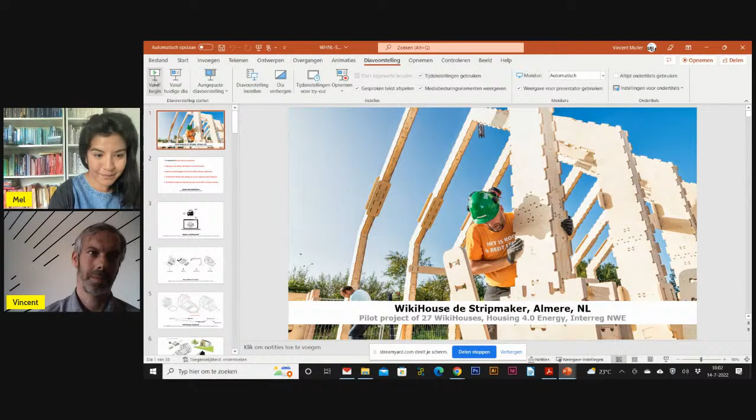So I hope you all see this. Yeah, it's all good. Yeah, okay, nice.

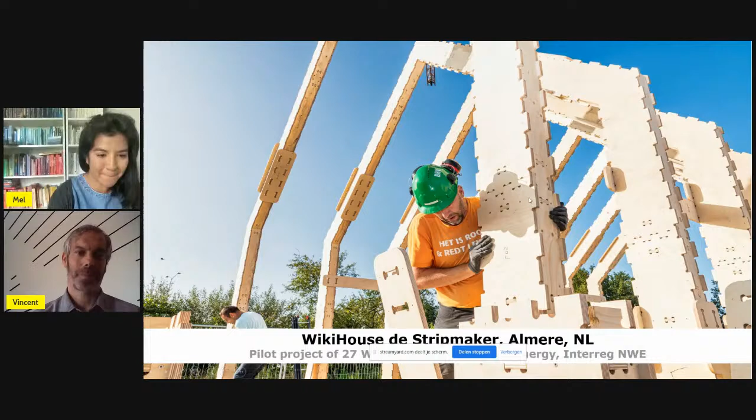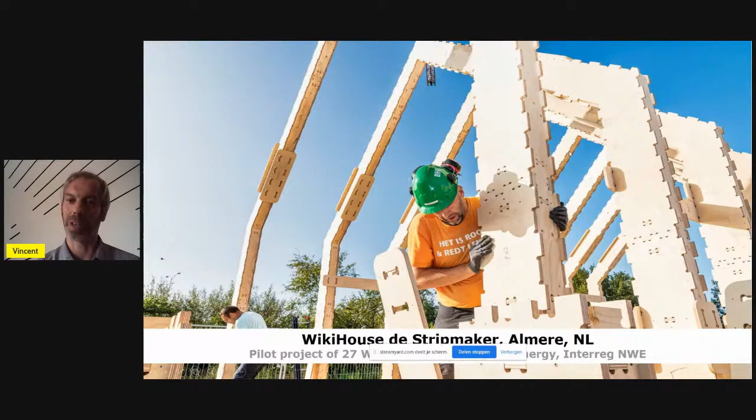Well, it's about the project WikiHouse de Stripmaker. It's the first project with multiple WikiHouses, 27 in this case. The project started in Almere, and the initiative was taken by Woningbouwatelier. Ivar Diekerhoff is also in the background, maybe for questions later. He's the one who came to me with the question: we want to realize a WikiHouse area in Almere with 50 WikiHouses. So that was really cool.

And we had some goals and ambitions created for this project. Very important was that it should be accessible for people with lower income, that it would be possible to make your own design with help of a toolbox, build it yourself together with help of family, friends, and neighbors. And it should be environment friendly, zero energy, low carbon footprint. And of course, important about WikiHouse is sharing the knowledge and experiences - it's the open source part of WikiHouse.

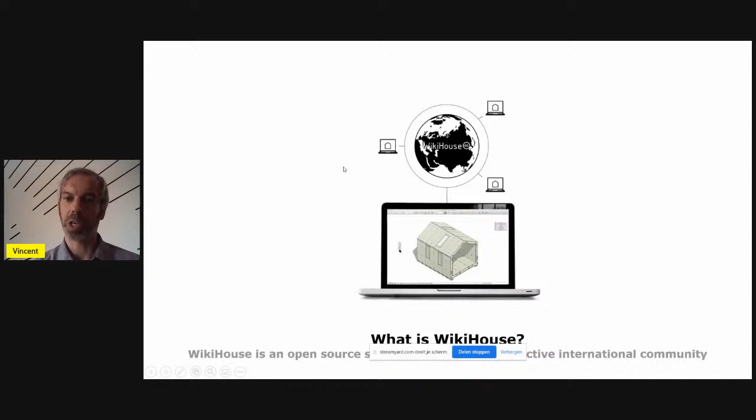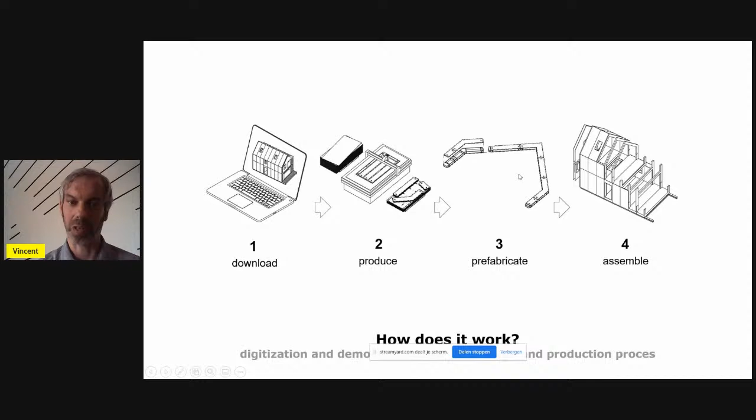Those were the goals. First, I would like to explain a little bit about what is WikiHouse for the ones watching this stream who are new to WikiHouse. I'll try to do it quickly. It's an open source self-built concept with an international community. How does it work? In essence, it's like this: you download files, you produce it with a digital CNC cutter, and then you can assemble your house with the parts. The parts are made of plywood that you can cut with the CNC. So that's very briefly what WikiHouse is.

It's now existing, I think, almost 10 years or even maybe a bit longer. So there are different kinds of systems in different parts of the world, and in Almere we created Swift. We downloaded the files of the Wren system - that's a system from like 5-6 years ago, I think, or even longer. We wanted to improve it or make it fit the local situation in Almere, and also create some better floor plans. We wanted to create a 4.8 meter span width, because Wren could only go to 3.6 meter span. Some other systems are there too, like Blackbird, and of course Skylark, which launched at the beginning of this year.

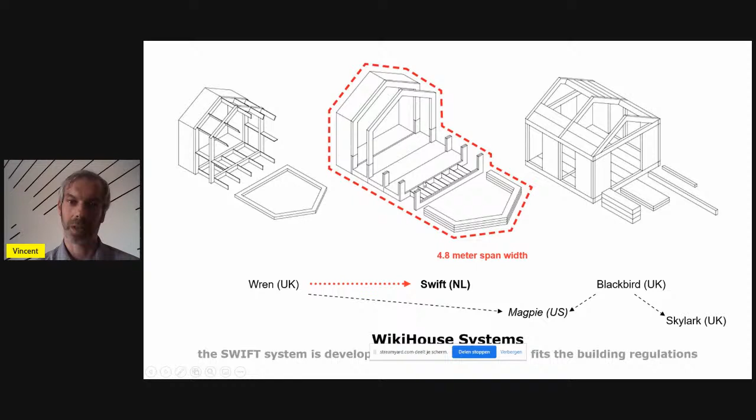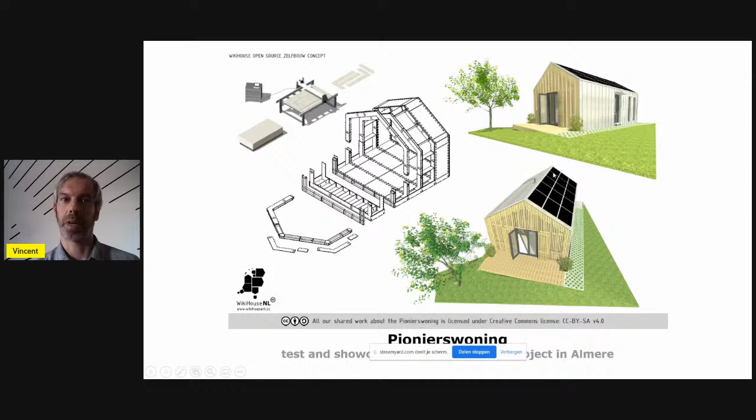With the Swift system, we did a test showcase in Almere before we started with this area of more WikiHouses. It was the first time we were going to realize a WikiHouse you could really live in, one that would fit the permit and the building regulations. This is the test showcase, the pionierswoning in Almere Poort. And this is the design.

It's a small house. Here you can see a little bit how the Swift system works. It's based on slices, or modules, as we call them, and you can create a house by putting more modules behind each other.

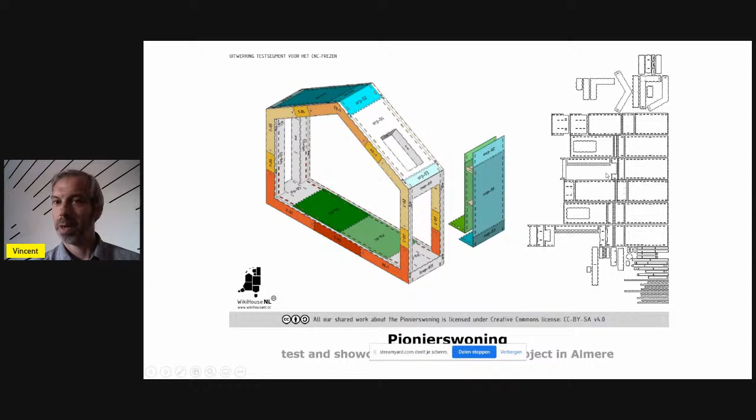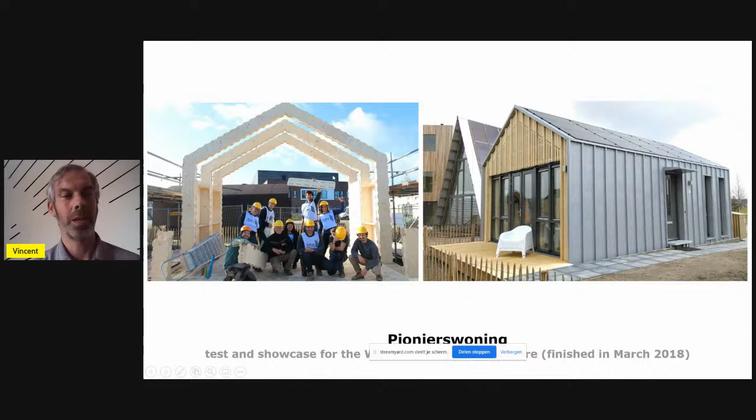This is what is realized. This is the pionierswoning. This test case we also helped build, together with some international volunteers who were interested in the WikiHouse way of building.

Well, it was a success, the pionierswoning. It worked pretty well. Then we needed a location for this area with more WikiHouses. So it ended up with 28 WikiHouses instead of the 50 that was originally asked.

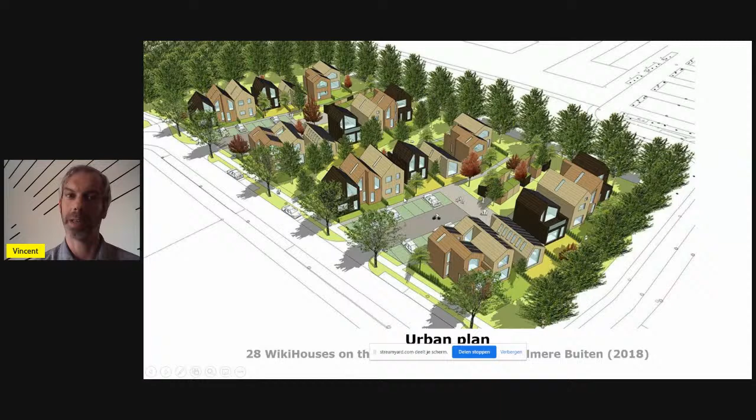But we got this really nice area on the edge of the city, close to a natural environment. So this is the urban plan, which we used for discussion with the municipality and creating a vision for what it should be, along with some images of how the exterior should look, together with the municipality and urban designer. Natural materials, not stone or concrete or whatever.

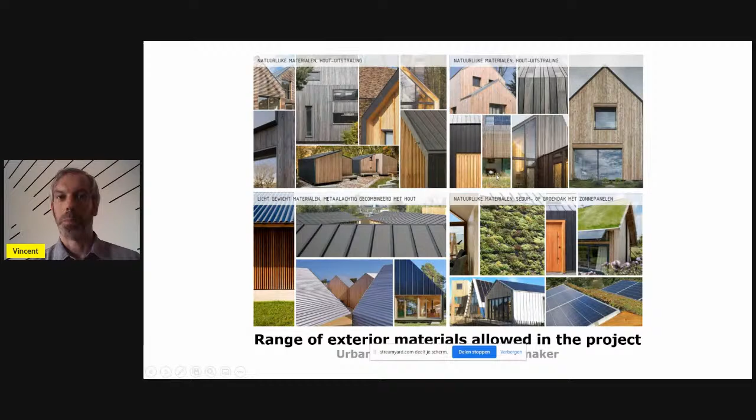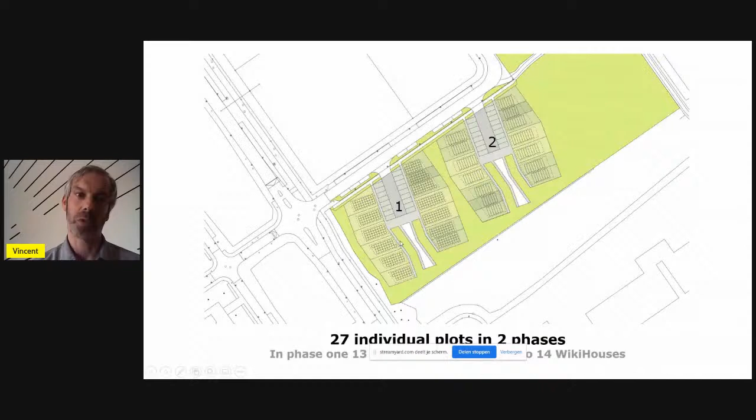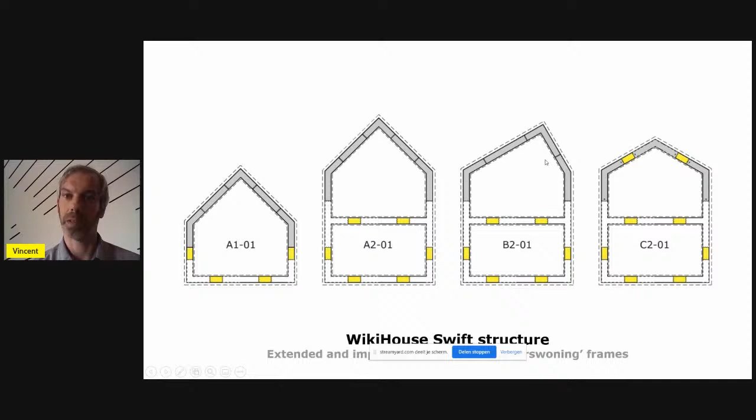So I will start with phase 1. The first challenge we had before we started the project was to change the Swift system of the pionierswoning, similar to this one, the A1, to make an extra floor. So we did a lot of structural tests and calculations together with advisors to create it, and in the end, it worked out to this system.

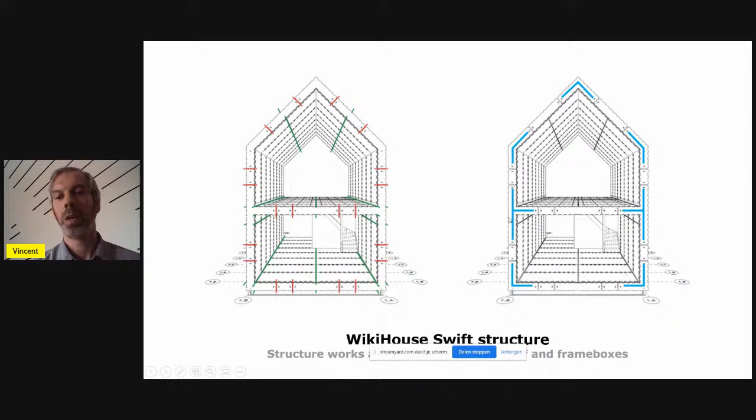So we decided to make the frame pieces all in birchwood. Birchwood is stronger than spruce plywood, which is what the rest of the parts use. And from there...

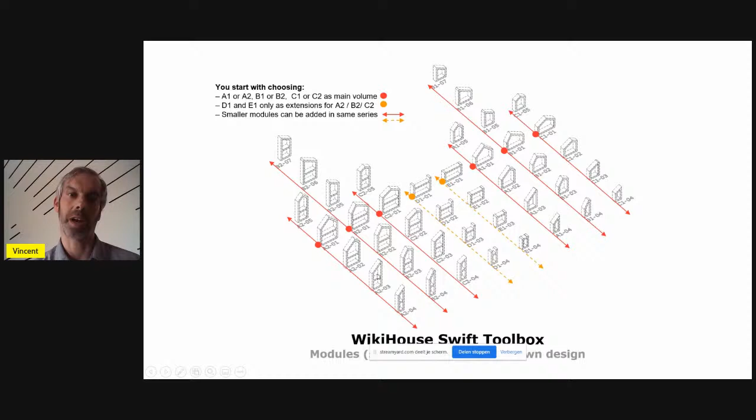So for phase one, we started with a kind of workshop using scale models, and they designed their own house exactly to scale together. That was really fun to see, because they really checked each other out, asking why are you doing this, and then they got inspired by each other. It was really fun to see them changing their designs because the neighbor was doing something else that they also liked.

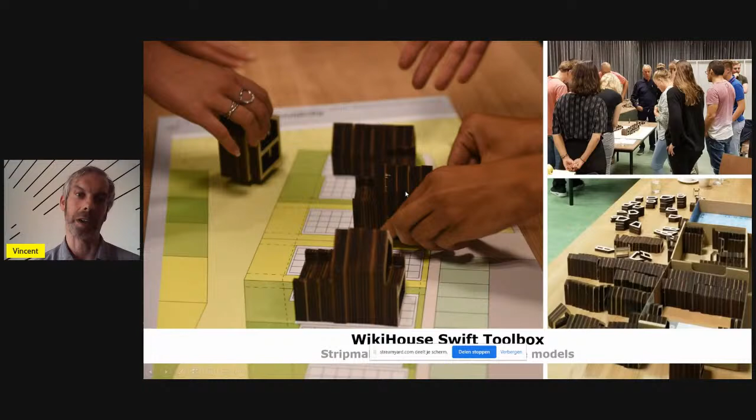For example, this is one of the designs of Sebastian, one of the guys really involved in WikiHouse, especially the construction. We made this design - well, actually he made it, and I helped him with that.

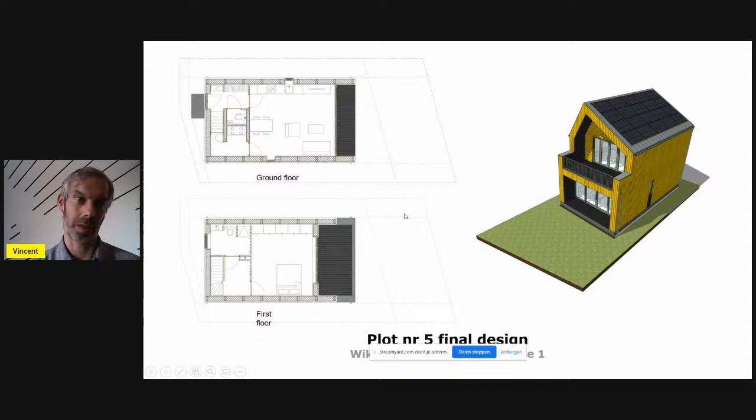And this is the final design, which is where the permit is. We got the permit. Here you see the final designs of phase one. The yellow one is still this of Sebastian, plot number 5.

Now, after the permit, you start with construction. Well, there's a lot of logistics before that, and planning of course. But you have to know what the building order is of the Swift system, so this is how it works.

Mainly, you start with the foundation. That's done by a contractor - you cannot do that yourself. It's like steel beams and concrete piles in this case. Of course, it depends on your location how your foundation will be made.

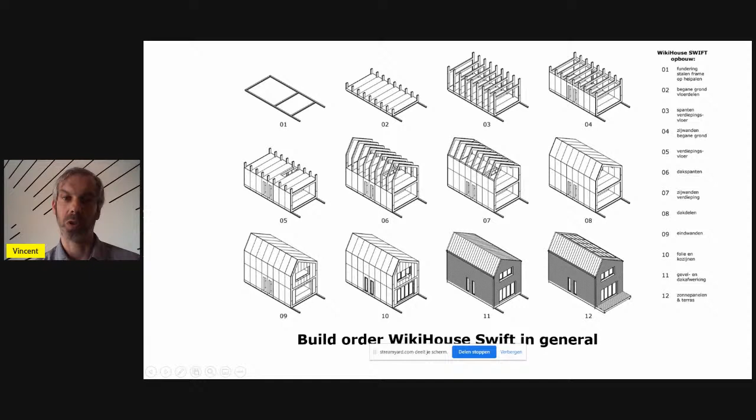But after that, you're going to build your floor modules, like number 2. Then you start raising frames, adding wall sheets, floor sheets, and then you go to the next frame, the roof frames, and then again all the sheets. From there, you're going to put your windows in and finish your house on the outside.

Some images of the construction. Of course, this self-building is not without help, you are getting an instruction manual for that.

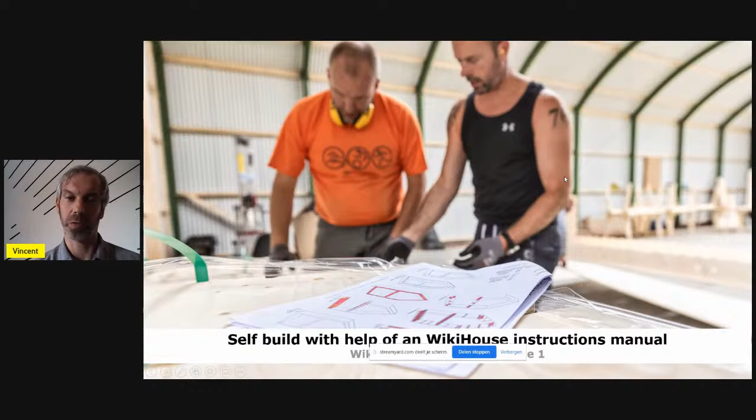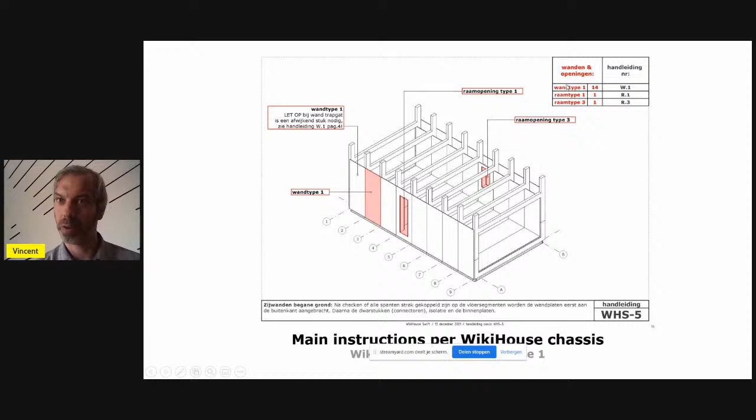Every WikiHouse that is built has its own manual, for the main one, call it a main manual, and on every page you get detailed instructions like this. This is a detailed instruction, and it's the same for a lot of parts of the WikiHouses.

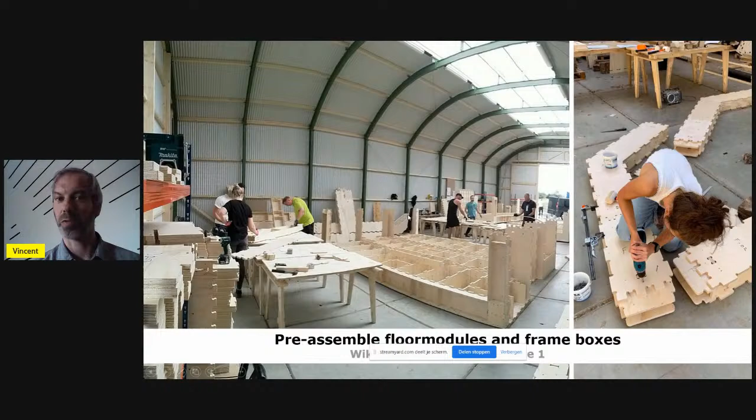You can start with some pre-assembly of the pieces, and you can do that inside somewhere because it's wood. It can help you build faster if you pre-assemble as much as possible somewhere inside.

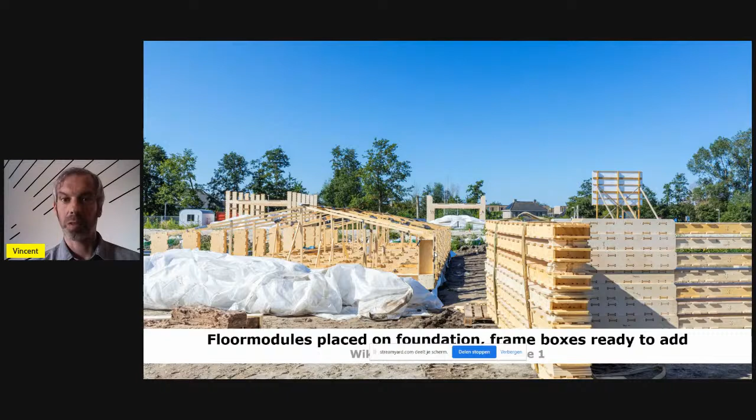In this case, they built a shed on the construction site, and there they put the parts together. Then when you have these pre-assembled parts, you go on site, like this, the floor modules and the frames waiting to be raised, like here. Here you see, by the way, Sebastian, this guy we talked about before.

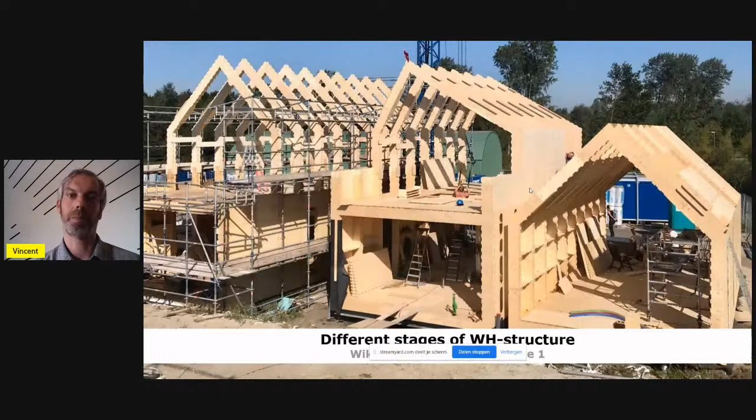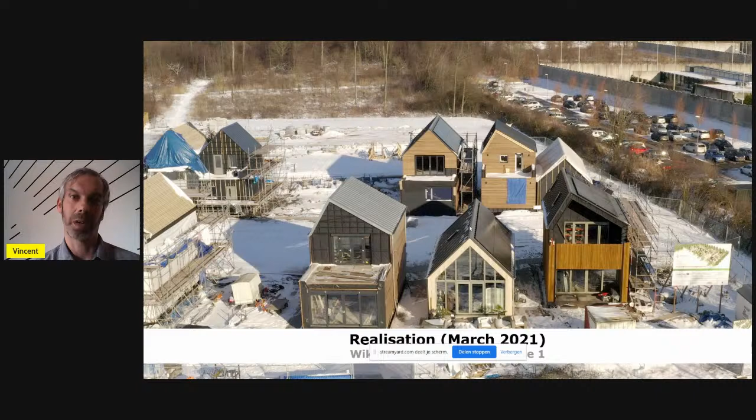Different stages of how the chassis is built, like you saw in the drawings before. And here it's almost the finishing of phase one, especially the exterior. Some people are still building the interior, almost finished. It's also the house of Sebastian.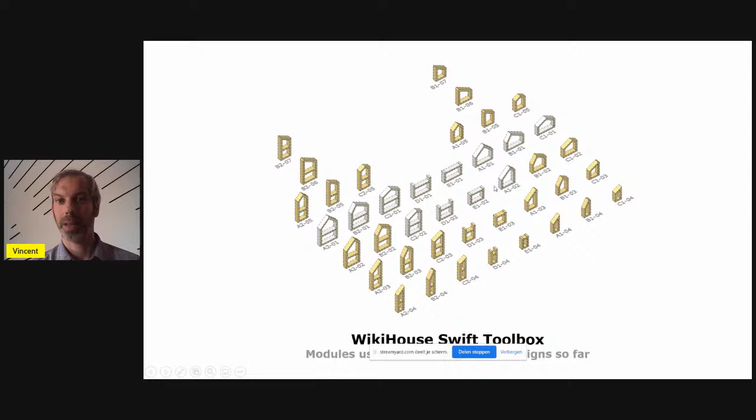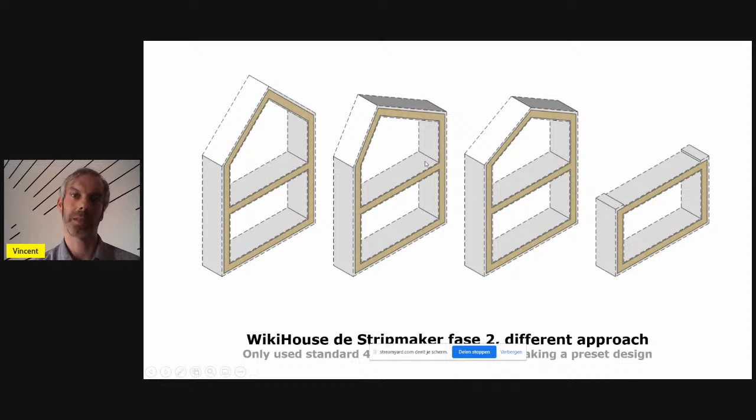We had some pressure on the planning, so we decided to make preset designs for phase two, and we only used some standard modules. It ended up in 5 types of houses.

The yellow plots are private clients, and the other ones are an investment by Steenvlinder Inc. That's a special way how you can buy a house.

You rent first for 5 years or maximum 5 years, and then you buy it for a fixed price, fixed before you start renting. So that makes it really accessible for people with a lower budget. They did 10 of these houses, or actually 11.

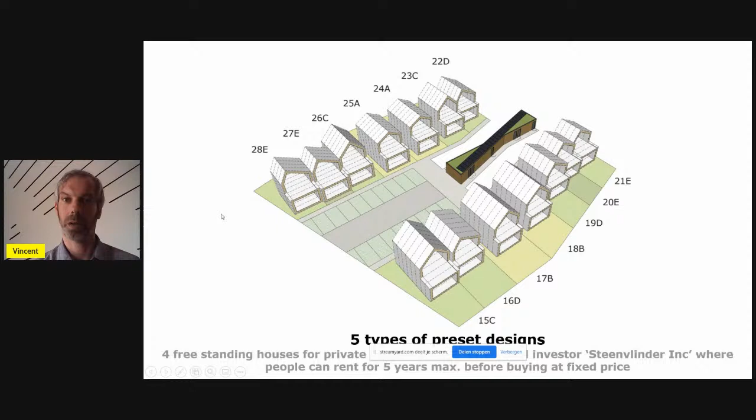One of the important things of this second phase was that we made some changes to the design principles, because we had to add a stability wall in phase one during the design process, and most floor plans were already finished. So it was really hard to fit them in, and all the stability walls had different sizes.

So for phase two we made one standard stability wall. You can see the first one above is just the number of modules of these 5 types of WikiHouses, the preset designs.

Then we created the zones where you can put the stability wall. So the bigger your house, the less flexible the zone is where you can place it, because it has to be more or less in the middle, and it's calculated on the biggest one. On the smallest house you can place it everywhere, and you could even make it smaller, but we wanted to keep it standard.

It's important that it always goes together with the stairwell, the place where you put the stairs. You can choose the side of the wall, and place it against the side wall or in the middle, like here in the middle.

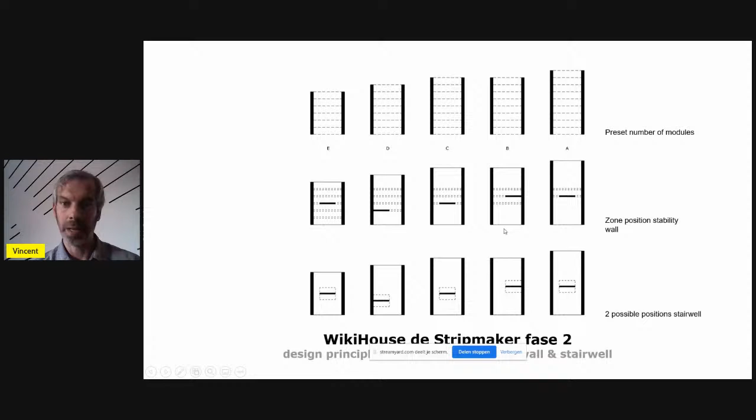Here you see the stability wall is a kind of laminated wood cross, and that must be connected with the foundation, so a steel beam goes under it and has to be connected. That's how it works in a technical way.

Importantly, we are still trying to find out how to replace this stability wall, or get rid of it. It would be best to make the structure stronger in another way, or maybe put it in the end walls instead.

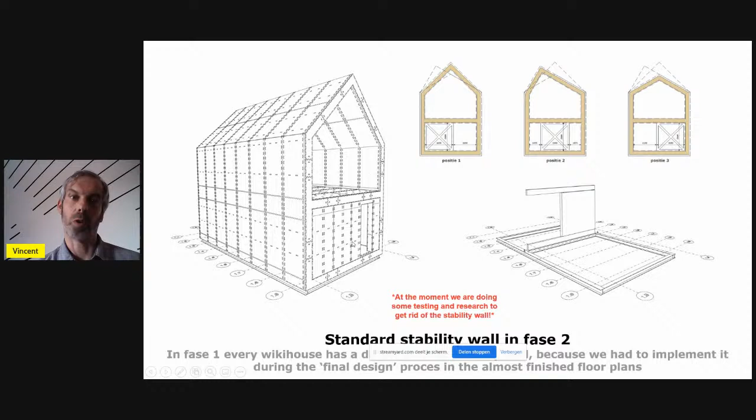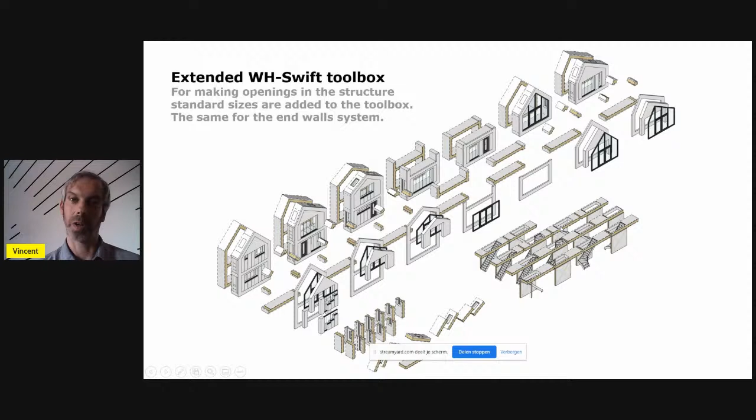We had this toolbox of modules. Also in the second phase, we had a more modular system for the openings you make in the side walls. You can see them below, and also which stairs you can place, and the end walls have their own system, similar to the Swift main system, but based on a modular size of 60 centimeters instead of 1.2 meters.

And in the second phase, one example, plot number 24, they used our VR tool that we have been creating, and they used that to design and experience their ideas about the floor plan.

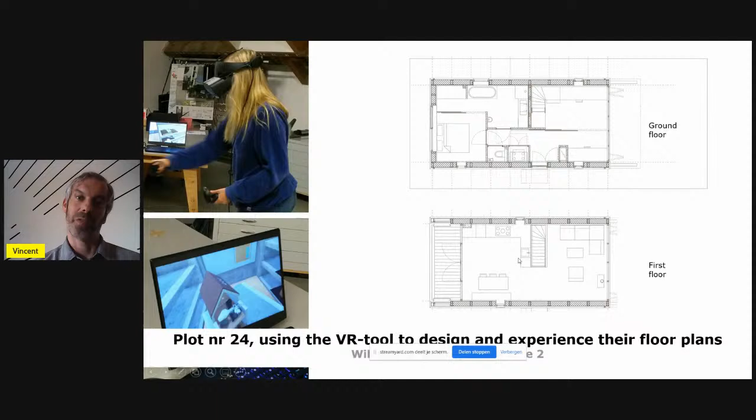Special about their floor plan is that they live on the first floor. So downstairs they sleep and have a kind of working space and bathroom, but live upstairs, and then they have a very nice view from there.

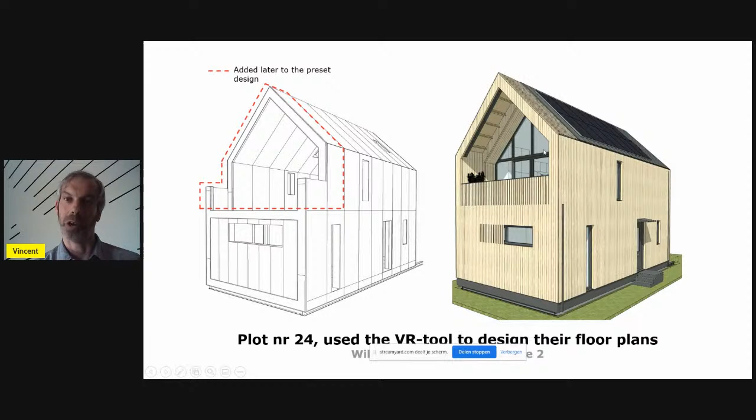Here you see on the left side the casco, but it's not the preset design anymore because they changed it, and it was allowed in the end because they wanted to make it slightly bigger, and they wanted some extra shadow above the big window against the sun.

So this is the final design of the Stripmaker phase 1 and 2 together. And what happened in phase 1 was that just before construction started, some of the self-builders stopped for different reasons, financial or some other reasons in private situations.

But so we adopted that in phase 2, so they also had to be built in phase 2. So they had to build 18 WikiHouses instead of 14.

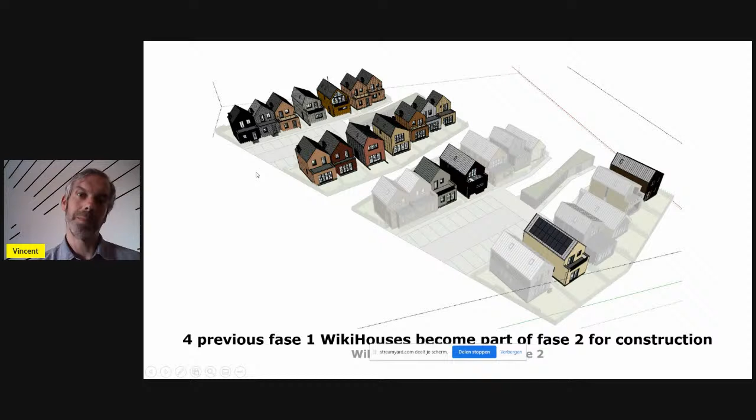So that's what you see here. We started building the WikiHouses in phase 1, then the phase 2 WikiHouses, but in between the phase 1 houses, and that worked pretty well.

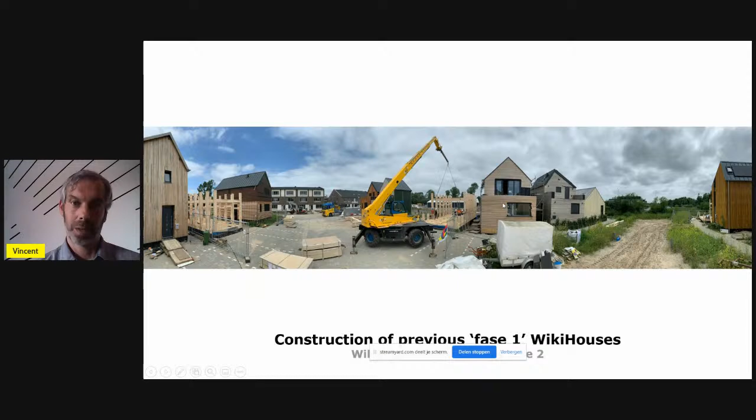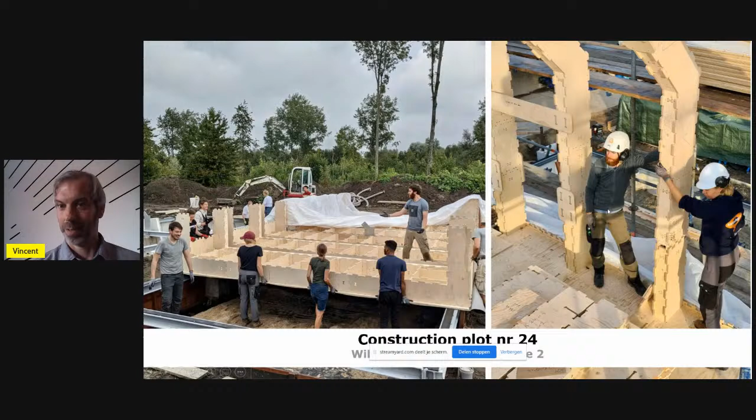And this is plot number 24 again. Here you see how they are going to build their house. Here you see the floor modules going on the steel structure, next to it the raising roof frames. Here you see the structure complete, coming to completion, and here you have a view from the roof to the other WikiHouses that are under construction.

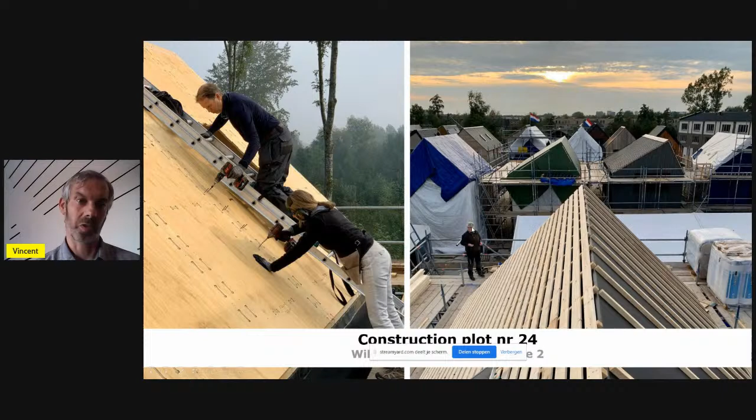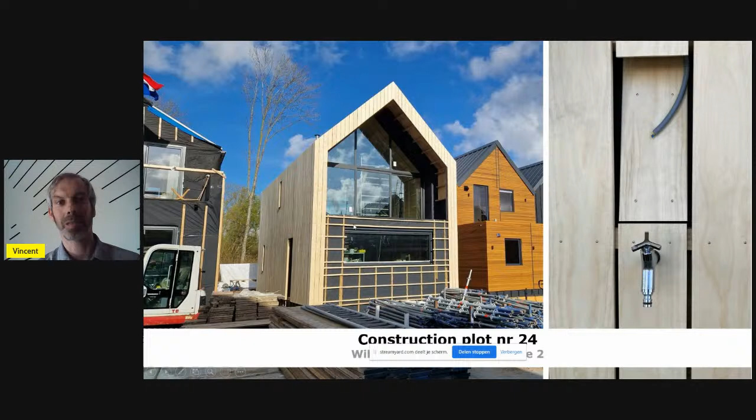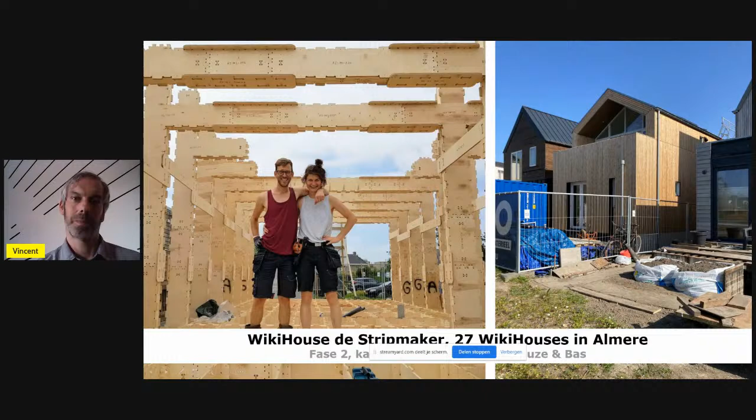Some of the almost finished houses, not all of them but a few, just to show you a bit what they have created. And also they choose their own facade materials, but it has to fit in the plan I showed you in the beginning—natural materials and not crazy colors or whatever.

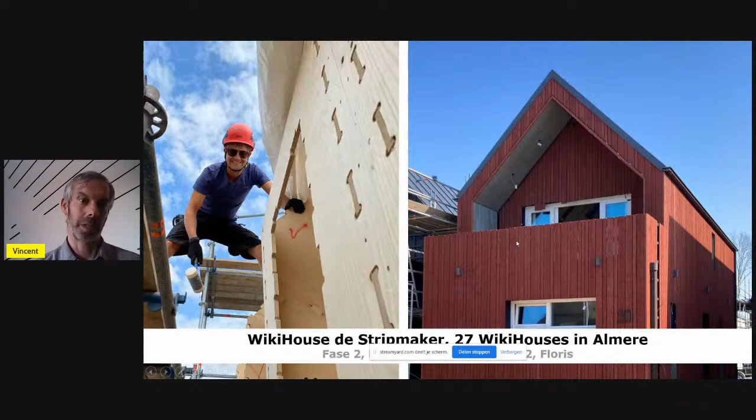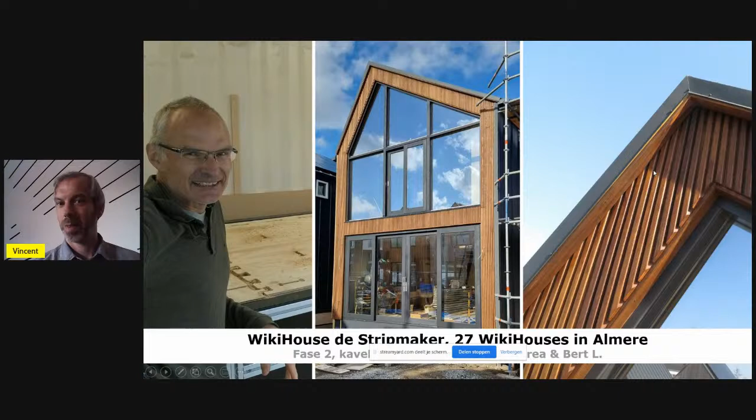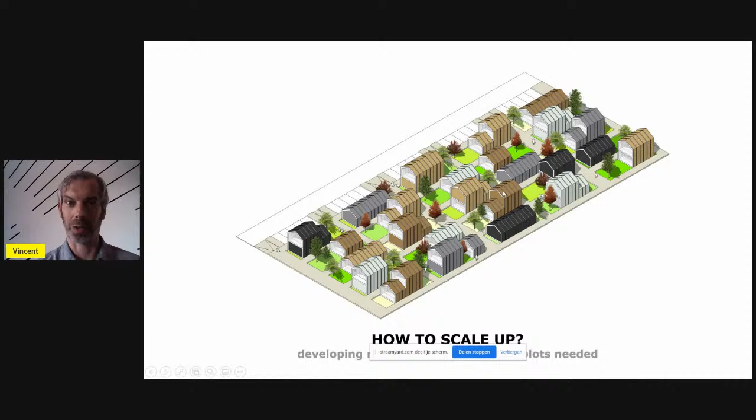Another example, a lot of insulation fits in the structure. Another example, how to scale up. That's still what we are doing together with involved organizations and professionals.

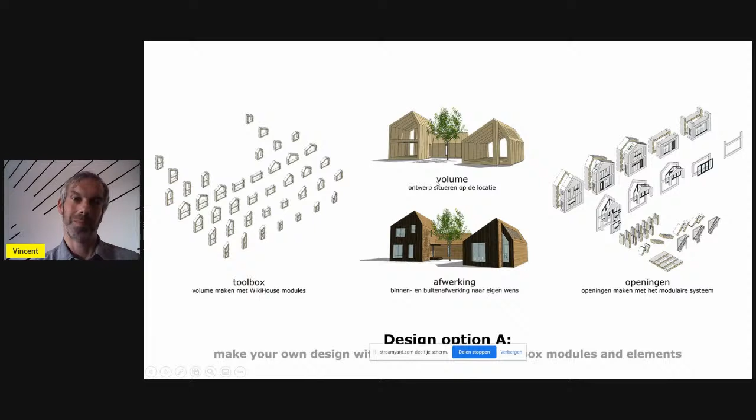We think we have 3 options. One option is download the toolbox and make your own design and do it completely yourself. Another option, a bit easier, is that you order one of the standard designs we have made, 6 modules, 7 modules, and 8 modules. You can order that, and you can have some influence on, or change the floor plans a bit, but that's it.

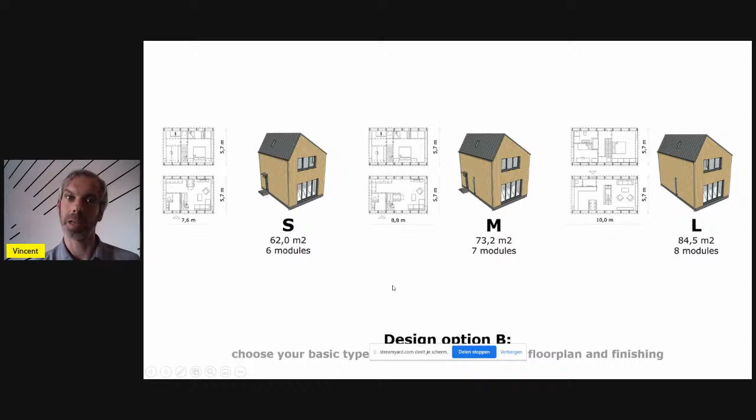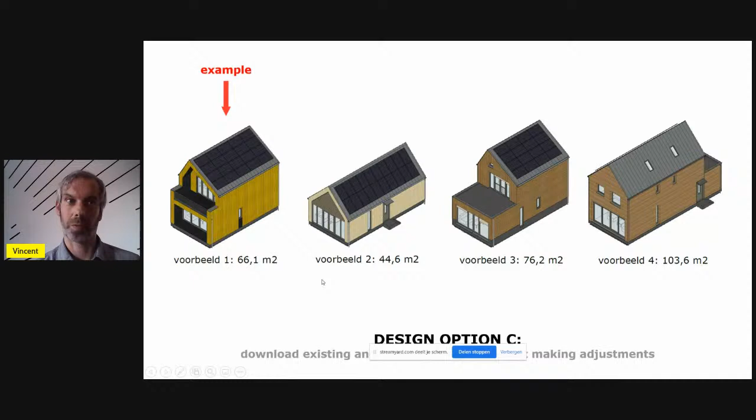And you can, of course, download the existing houses and just copy them and build them yourselves. Well, here you see the house of Sebastian, the guy who was in the beginning.

Yeah, so this was the presentation.